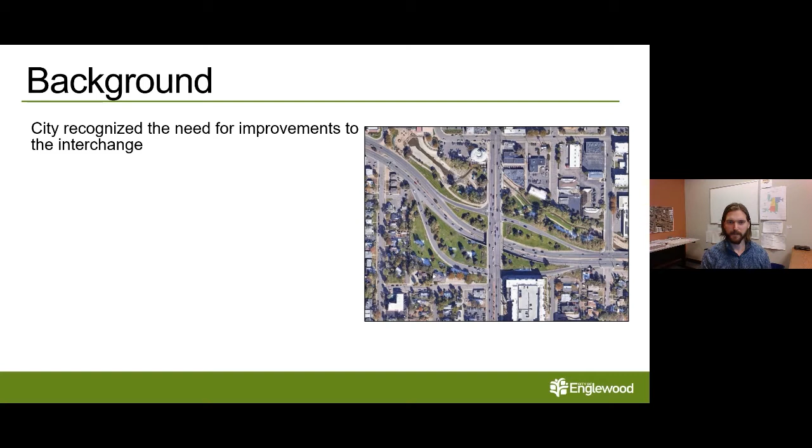The city recognized for some time that there were some major needs for improvements to this interchange. There are apparent deficiencies with safety, comfort, and traffic flow implications. For example, lane drops, which create a traffic bottleneck, short merge lengths, poor lines of sight, making for difficult and quick decision making, and narrow, unprotected sidewalks, leaving pedestrians at risk to vehicle traffic. The improvements proposed for this project will be crucial to Englewood's continued growth and development and will have significant impacts on the success of the city as a whole.

In early 2019, staff submitted an application for the Denver Regional Council of Governments 2020 to 2023 Transportation Improvement Program. Upon being granted the funds, staff worked with CDOT to develop an intergovernmental agreement, which was presented to City Council for approval on May 28th of 2020. This agreement, which is required for all federally funded local agency projects, sets the terms for utilizing the awarded funds and dictates things like which agency will manage the project, which agency will be responsible for maintenance, and when the funds must be spent.

Following execution of the IGA, the city solicited engineering services through a public request for proposals. 11 different engineering teams submitted proposals, and ultimately Atkins Engineering was selected as the most qualified firm. Atkins has been working on the project since December and has been busy establishing site conditions, generating traffic models, and researching environmental resources.

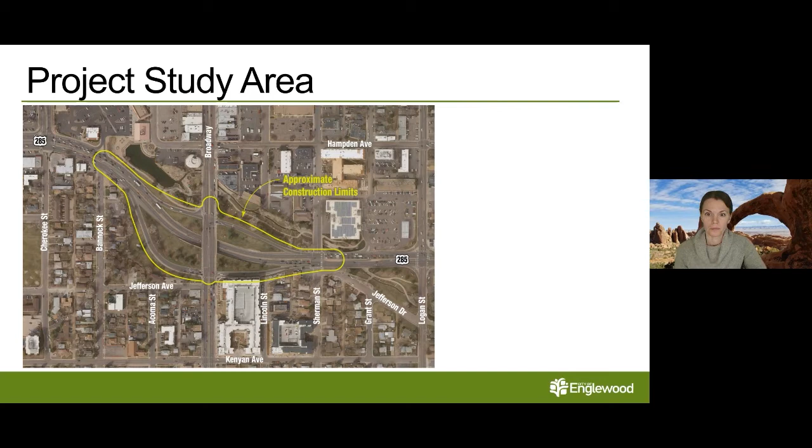So now I'll walk through some of the project conditions. As Jake mentioned, as part of the project we want to widen US 285 to 3 lanes under the bridge in order to relieve the bottleneck that occurs when the lanes drop at the interchange. That lane drop creates some safety issues, and we'll dive into those in a minute, and also causes pretty extensive queuing and congestion along the corridor.

In addition, there are several other access locations that are closely spaced in between the intersections that create safety issues. So we're going to look at all of these things, and as Jake mentioned, improve safety for all users within the study area.

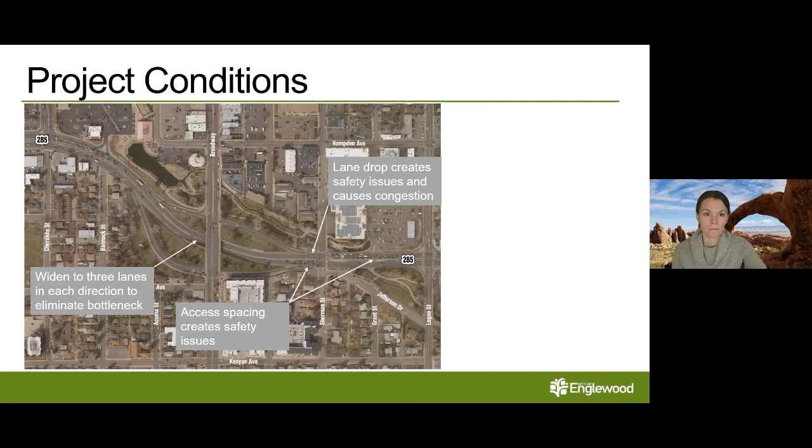As I mentioned, there's extreme queuing that happens during the morning and evening peaks. The blue arrows show queuing that occurs during the morning peak, and the orange arrows are showing the queuing during the PM peak. Some of the other elements to note is there is congestion occurring further to the west due to the lane drop again at Santa Fe, but that's kind of outside the study area.

The other element I want to point out are the letters that you see, which are the level of service. That tells us how well intersections are operating and handling the demand that's placed upon them, and that's a graded system between A through F, with A operating very well and F failing. And we do have several locations that are reaching that failure point.

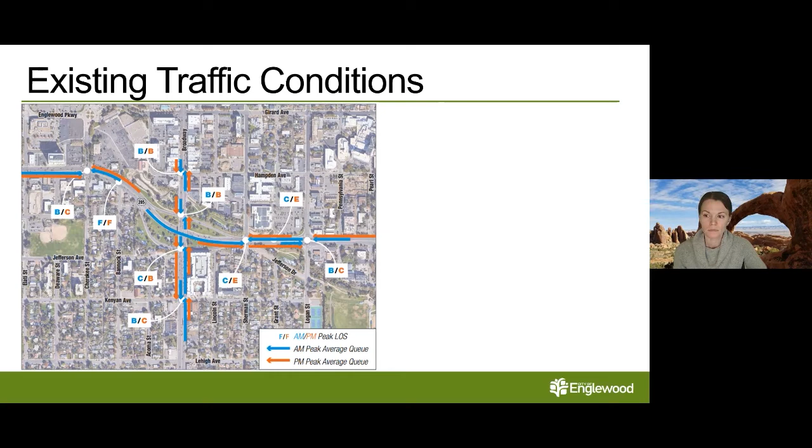Diving in a little bit to some of the specific crashes at some of the access points within the corridor - these aren't all of them that are occurring, but focused on those crashes that occur as vehicles are trying to turn left. Those tend to be your more severe crashes, your broadside crashes, approach turns. You can see that there's several crashes occurring at all of these access points.

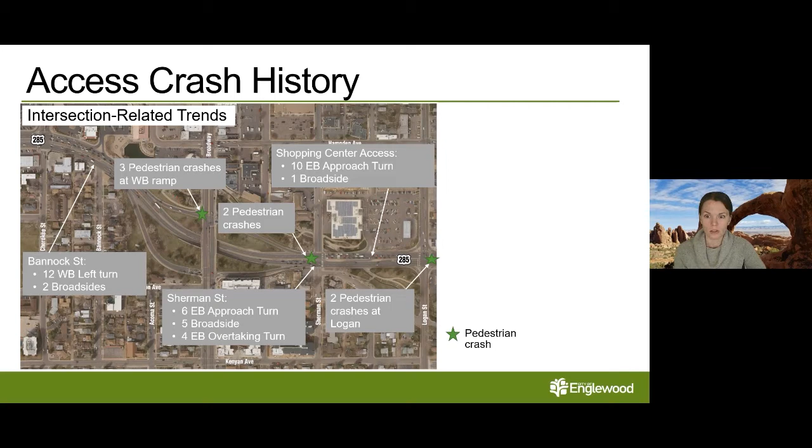And with that, I'll turn it over to Carol.

Thanks, Jamie. Because there are federal funds involved in this project, we are required to comply with the National Environmental Policy Act, which requires that we identify all potential environmental impacts that could result from the project. It also requires that we work to avoid, minimize, and mitigate those impacts. For this corridor, the main resources that need to be analyzed are air quality, noise, biological resources, historic resources, and recreational resources.

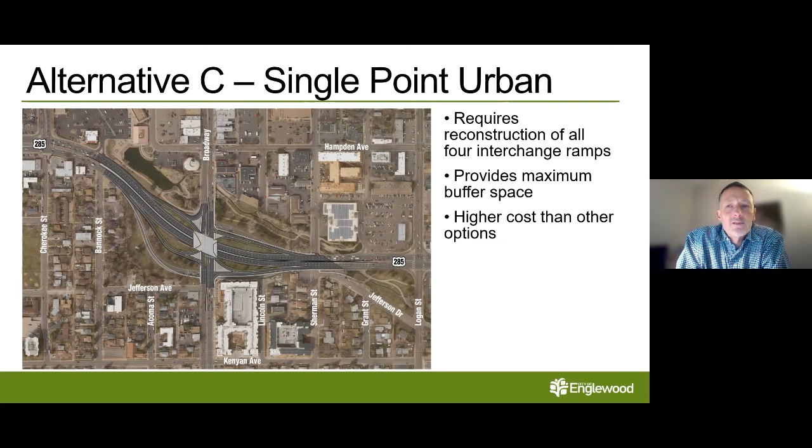So if we can separate those, that's a huge improvement. We'll be looking at enhanced roadway crossings of the intersections. As Jamie mentioned before, there were some accidents that we saw with some of those ramp intersections, so we want to make sure that we have enhanced roadway crossings.

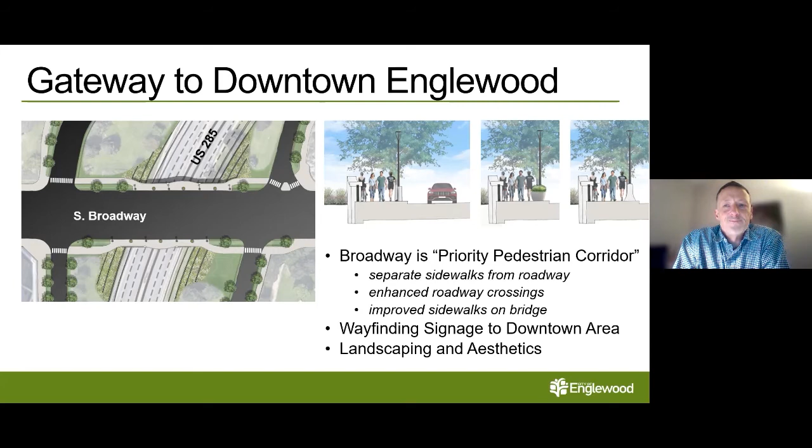So we want to make sure as we're developing solutions that we understand that, and in particular, as we talked about before, if we're going to be closing the signalized intersection at Sherman Street with 285, that we have implemented solutions associated with that, which is on the next slide here.

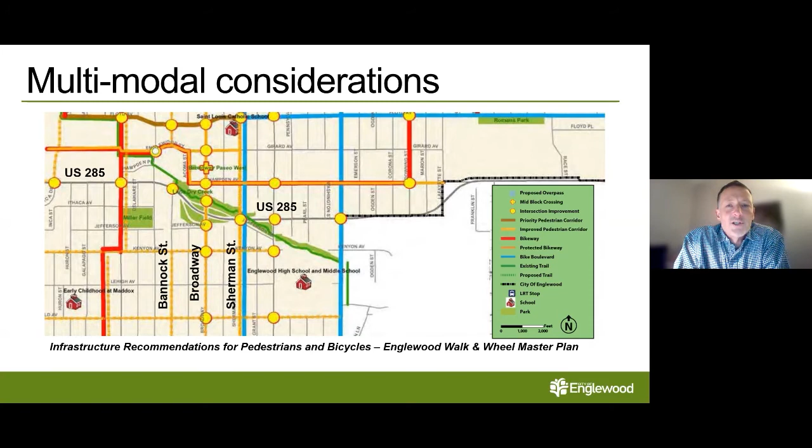What we'll be doing is implementing signing to direct bikes and pedestrians down to the Little Dry Creek Trail underneath 285, through that existing underpass bridge, and back up to Sherman Street on the north side. That way we don't have pedestrians crossing the street in a more dangerous environment.

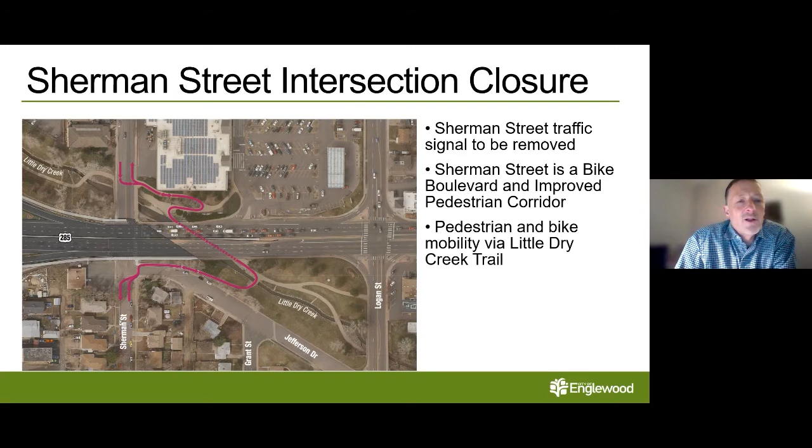I want to close it out with a discussion about where we are in the project schedule. As Jake mentioned, we got started on the project in early December, and since then we've been doing traffic studies and alternative analysis, getting us to the public meeting we have here today.

We'll be taking the forecast traffic volumes and studying that with each of the interchange alternatives over the next couple of months. We'll be coming back to another public meeting in May, at which time we're expecting to get to a point of making a selection on the preferred interchange alternative.

At that time we would move into design, the environmental, finalizing the environmental approvals and compliance, as Carol talked about. Then over the rest of the year, we'll get through final plans with construction anticipated about a year from now, so spring or summertime of 2022 before we get to construction.

As I mentioned, over the next several months we'll be doing future forecasting and analysis of alternatives, getting to a preferred interchange selection in May, at which time we'll be coming back to the public to get additional comments on the alternatives and evaluation studies that we do. So with that, if we have any questions.

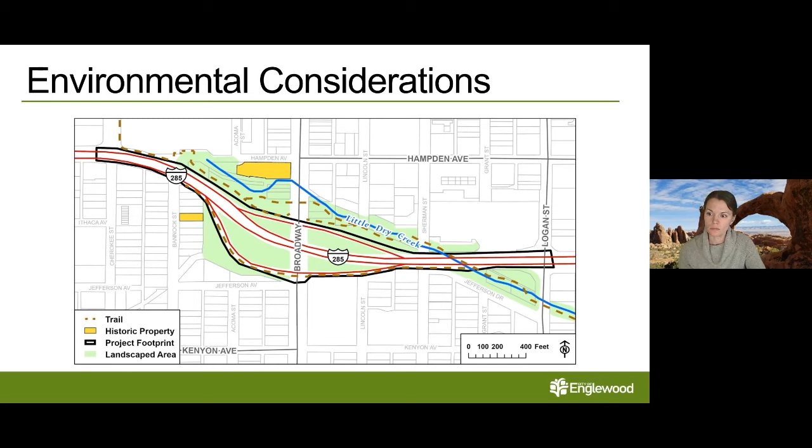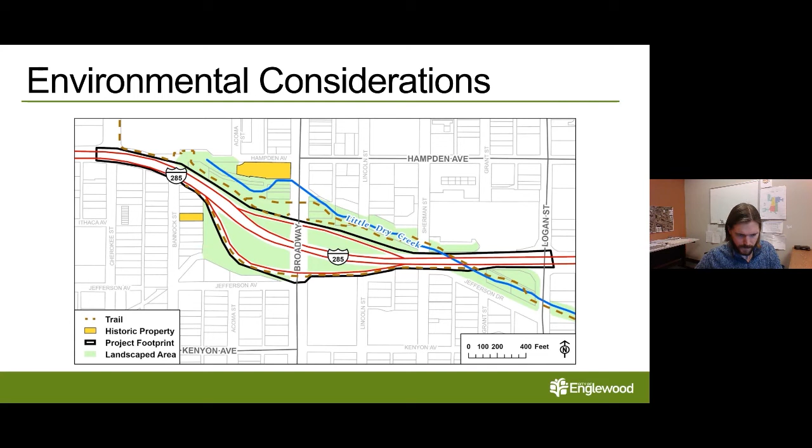Dan, do you want to address Michelle's question? This is probably a good question for Carol, but the question is, will there be a sound barrier under the Broadway bridge with the new design? The sound now bounces off the concrete walls and keeps people up at night, especially in the summer when windows are open. As Carol mentioned before, we are required to do a noise study as part of the project, which involves studying existing noise levels as a baseline condition, and then what the future noise levels would be after the project, and developing solutions based on that. Carol, I think you pretty much covered it.

We'll definitely be assessing the noise impacts, and we'll be going through a process to determine whether or not it's feasible to construct a noise wall if there are impacts. We won't know whether or not a wall would be constructed until we go through that process, but it's definitely going to be looked at.

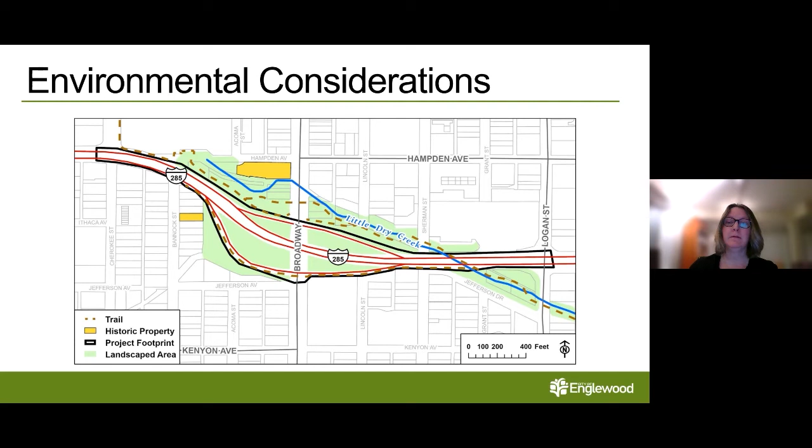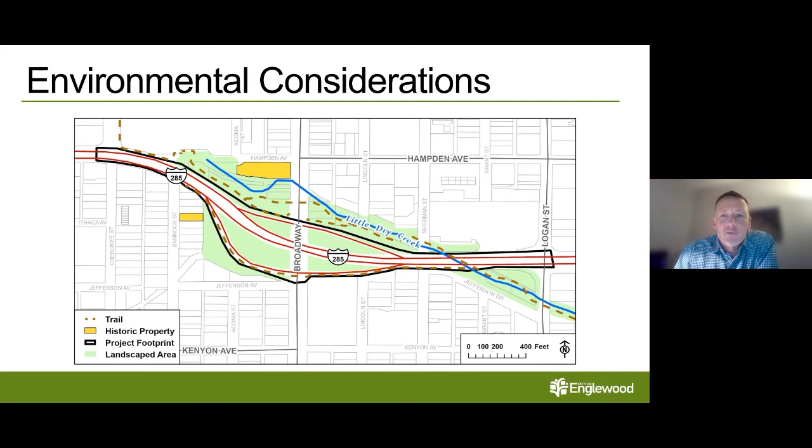I can try to address this next one. The question is, is there a plan for beautifying the medians on either side of the interchange? I'd say there's two different medians - there's medians on 285, and there's medians on Broadway as well. On 285, we're probably looking at potentially removing some of those medians and changing that configuration in order to get the width needed for additional lanes without having to widen the project to take additional right-of-way. That's one of the ways we're able to keep the project within the existing right-of-way and not impact adjacent properties, by using some of that median area.

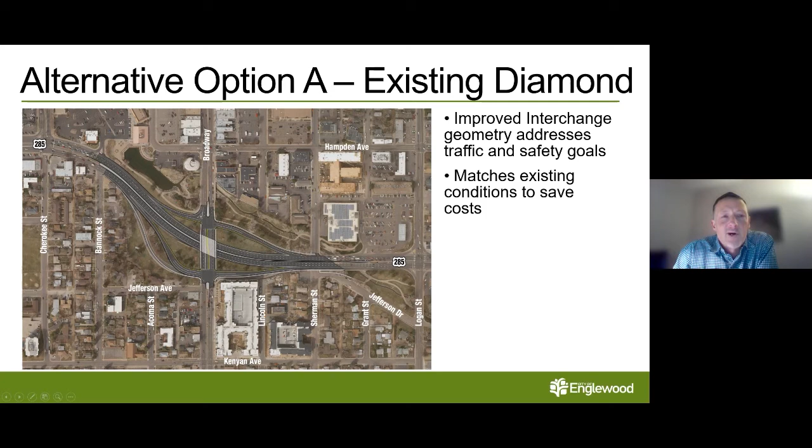There's so much traffic on 285 that having landscaped medians there is really a maintenance and safety concern. I think we'd focus our landscaping and aesthetic elements up on top, as you get off the ramps, in between the ramps, or if we move the ramps closer, maybe on the outside of the ramps. As I said before, I like trying to separate sidewalks from the roadway of 285 and putting some landscaping or buffer areas in there. Once we've gotten further along in the project and have a preferred alternative, we'll develop landscape plans and options - that's part of our scope, looking at wayfinding and landscaping for the project. But for the most part, that's going to be focused up on the top level of the interchange, not necessarily down on 285.

Let me read this next question - I think it's another landscape question. How will the project impact grading and existing trees in the interchange landscaping parklet? I noticed the sidewalk shifts to the existing roadway alignment in most options. I think what you're talking about is the ramp on the southwest corner, where there's a row of trees between the ramp and 285 today, and we show a new ramp in that location, moving further to the east.

What we're looking at is that ramp would potentially be north and east of the existing row of trees, basically moving the ramp from south of the tree line to north of the tree line, trying to maintain that row of trees. I do recognize that row of trees is pretty significant - it's beneficial, they're very well established. So as we look at that geometry, that's kind of how we were approaching it, trying to save that row of trees by going to the north.

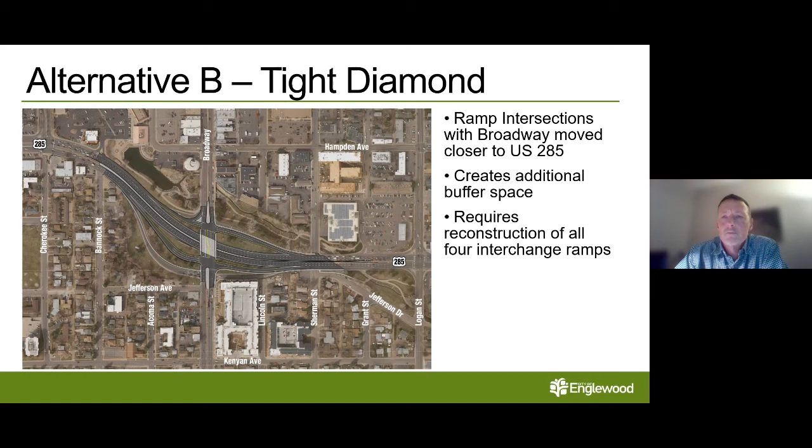Maureen has another comment: a community meeting promoted at Malley Senior Center would be good to engage seniors who use the corridor. That's a really good point. I've had discussions about this with our community development department, and I believe they have contacts with the Malley Center as well as other senior groups and communities in the city. So that's definitely something we'll look to do, engaging those communities and other users that frequent the interchange.

Wendy is asking, will construction be done overnight? As mentioned earlier, being pretty early in the design phase, we haven't ironed out those details yet. Overnight work can be beneficial in that it limits disruptions to traffic. However, there are obviously noise concerns and additional costs associated with working overnight. So it's something that may be done, but we just haven't gotten that far yet.

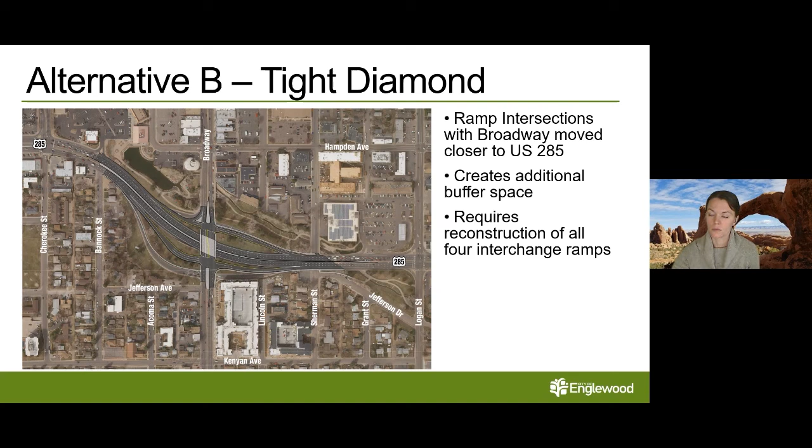Marty is asking, the project looks like it's making improvements to the greenbelt and park areas, but there's a vacant lot west of the bookstore which is an eyesore, along with the area around that bookstore. Any improvements to that area, trees or landscaping?

If I'm not mistaken, that's this area kind of northeast of Lincoln Street. We probably wouldn't be looking to make improvements as part of this project. That's definitely something the city can look into. If that's city right-of-way, maybe we can talk to the Parks Department about adding some plantings and that sort of thing. That's a good comment, and something we'll discuss internally.

I'm scrolling through our questions. I believe we've answered all of these, but we'll stick around for another couple minutes in case people want to ask more questions.

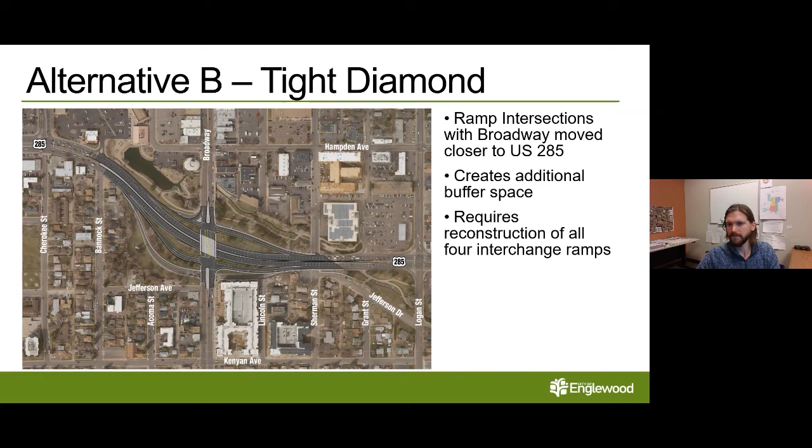Hey Jake, there's a question in here about funding, and I don't know if you want to go back to that slide and show it. Probably just got on a little bit late in the presentation.